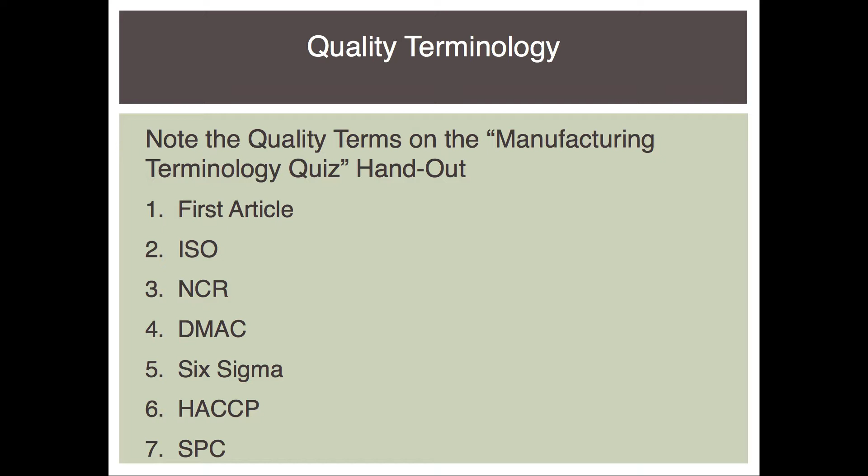I teach a class on problem solving which introduces the lean principles, 5S, Kanban, and also formal problem solving steps. From my background in manufacturing, knowing how to solve problems using those tools was extremely helpful in several of our processes.

The other term I wanted you to at least be aware of is called Six Sigma. It's a quality terminology process that was started by Motorola. Six Sigma defines that you can only have a certain number of defects per million parts. Whoa, that's a lot to measure, per million. So if you want to learn more about Six Sigma, definitely look that one up on the internet.

The other term that we talked about in our manufacturing series workshops is called HACCP, Hazard Analysis and Critical Control Points. HACCP is a requirement in any food manufacturing.

And the last terminology on your workshop is SPC, Statistical Process Control. Now, each one of the terminologies that I just mentioned, there can be an entire training program based around just that one term. So I wanted to give you a few quality terms that are very common in manufacturing, and hopefully if you've not heard of some of them, you would look up on the internet or do some research about them after today's workshop.

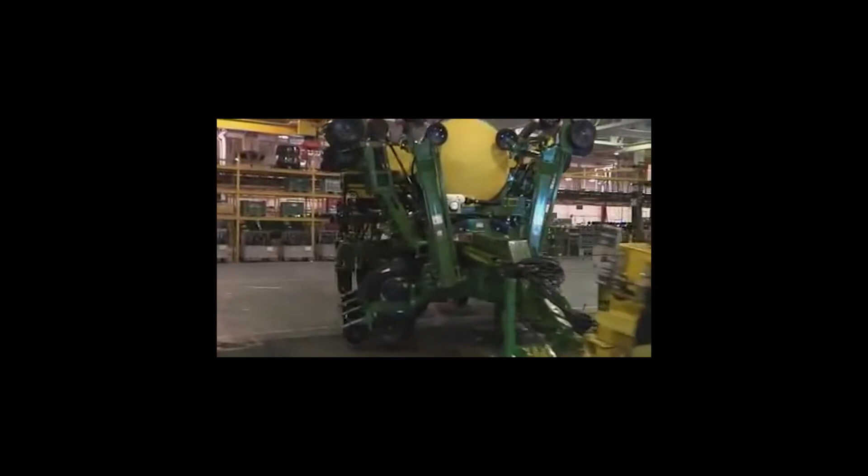Quality here has been a long-standing tradition. Everything we do revolves around quality. Started in 1837, John Deere was committed to quality. He always said that he would never put his name on anything that didn't have the best in it that was in him, and we definitely live by that. I would not want to put a product out there that doesn't meet the expectation for the customer. Quality is the same that goes in our golf product as our ag product. Every line in this factory and every line in other factories throughout Deere follow the same enterprise quality manual. So we all have the same processes, the same forms, the same documents, the same reference material that we can use to solve our quality issues.

Once we come up with our design, we can actually go off that design and do analysis. We can see on the computer if the design will meet customer expectations, before we actually build a prototype.

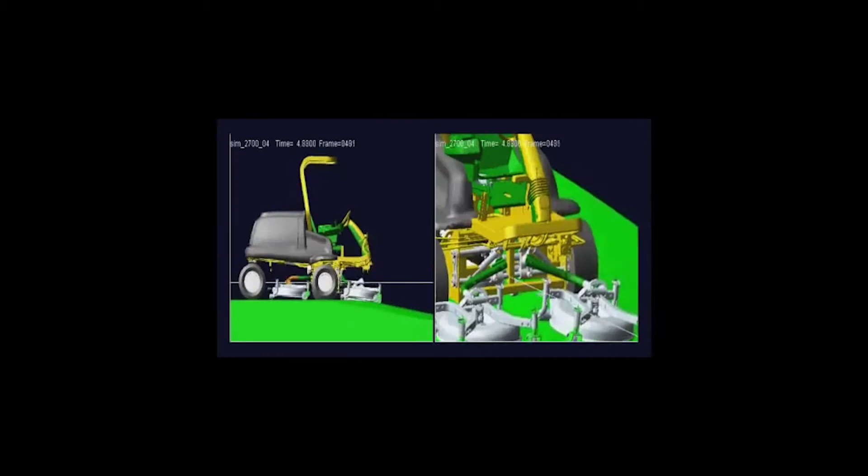John Deere doesn't shortcut on testing. We do field testing, we do lab testing. We also take our prototype machines to customers to make sure it's doing what is expected to be done.

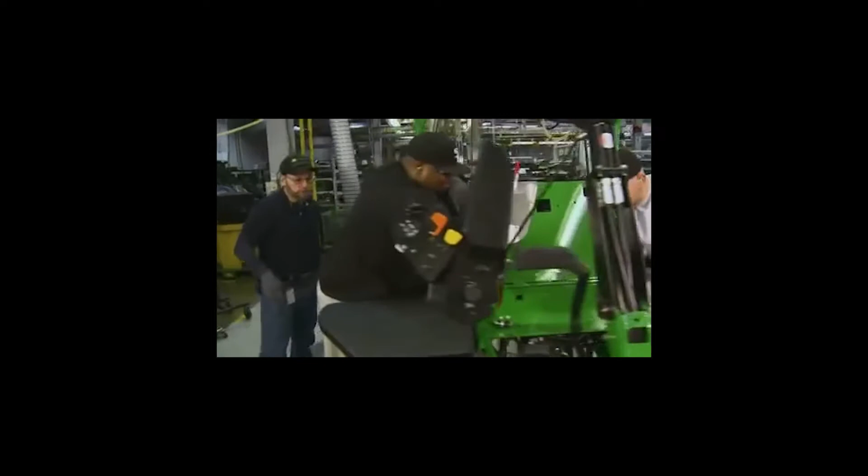When we're defining a product, we bring in manufacturing, weld, and quality people. What are our existing issues? What are our existing problems? We keep our assemblers in the loop throughout the whole process, from concept to out into production. It's kind of rare to see in today's world.

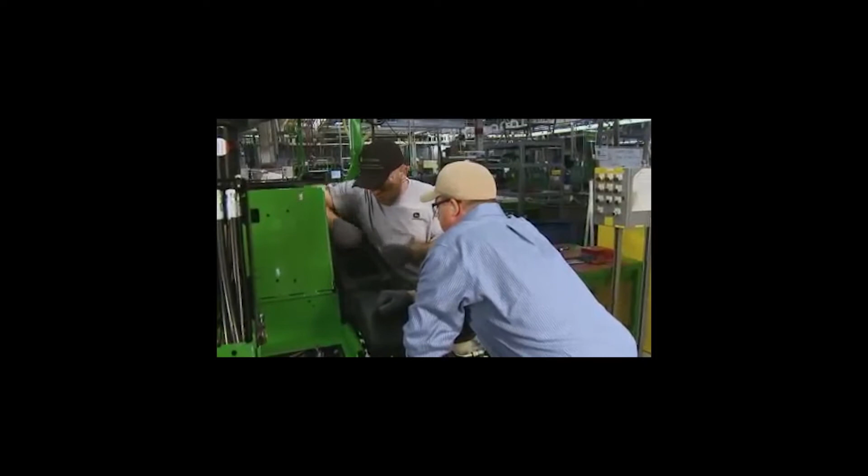It's really a team-based program on the fairway mower line especially. Everybody has a great attitude. They work great together.

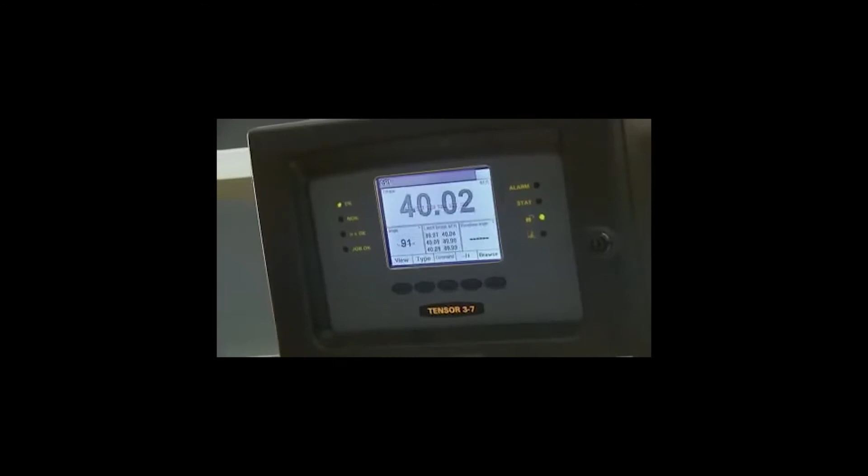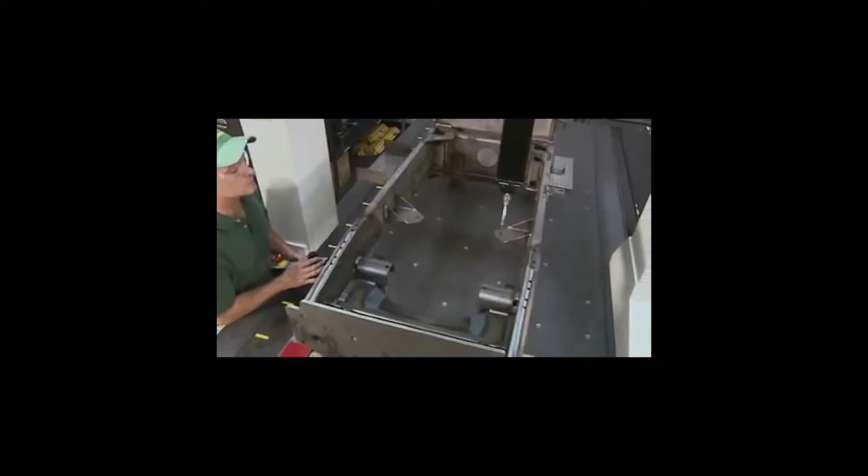We use all the most advanced technology that we possibly can to ensure the best product for the customer: controller-operated torque tools, Bluetooth-connected hand torque tools, paperless work instructions, Banner vision systems, RFID. CMM is a coordinate measuring machine. It ensures us that the parts we have out on the floor being built meet the print and meet the quality that we want it to have.

The fairway mower line does a 100% audit on all the products that come off. Mitzi, our auditor, will come in and go through about an 8-page inspection sheet. I probably know everything on that audit sheet without even looking at it. Torques, torque marks, loose hardware.

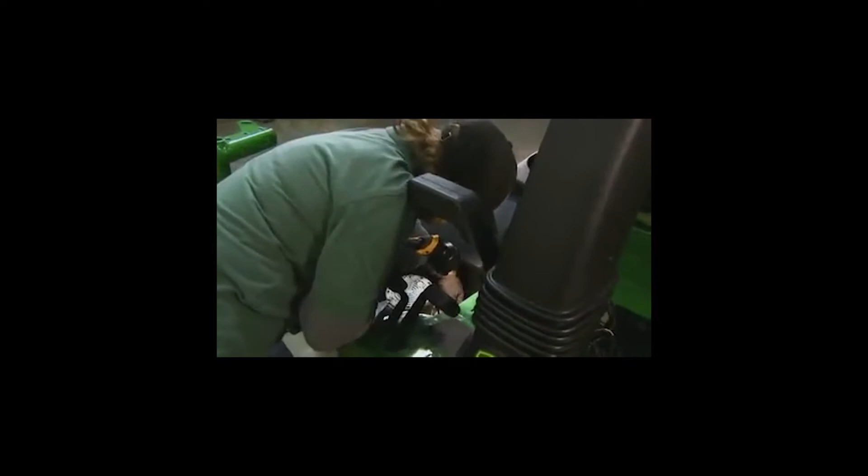Paint quality is inspected from top to bottom. All the safety decals, any missed welds, hydraulic lines, tie straps, harnesses, caution decals, information decals, hardware. We do safety tests. She black lights the machine to look for any leaks.

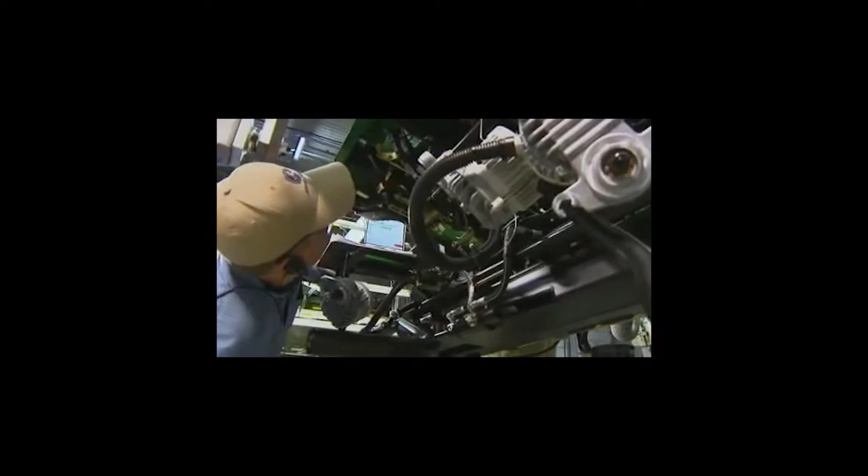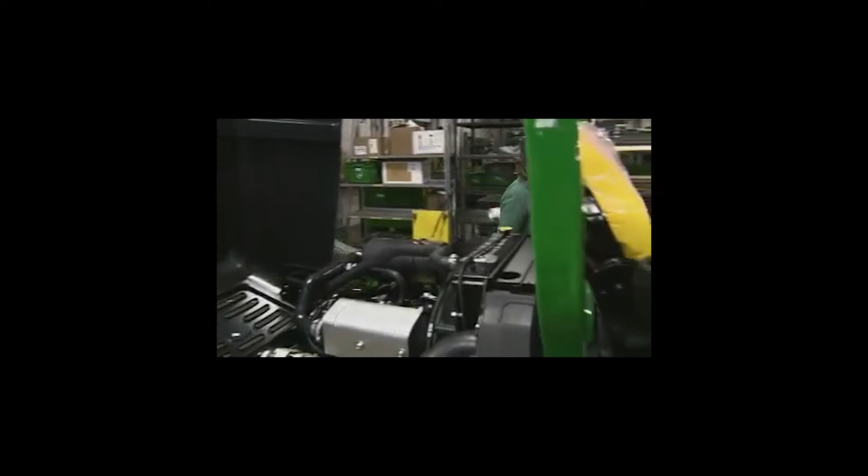Pretty much every portion of the machine is inspected, not only by the operator after he completes the work, but by Mitzi after it's completed off the line. Anything that doesn't look right, we question. When I audit a machine, I audit like I'm buying it. I work for the customer. I work for John Deere, but I work for the customer.

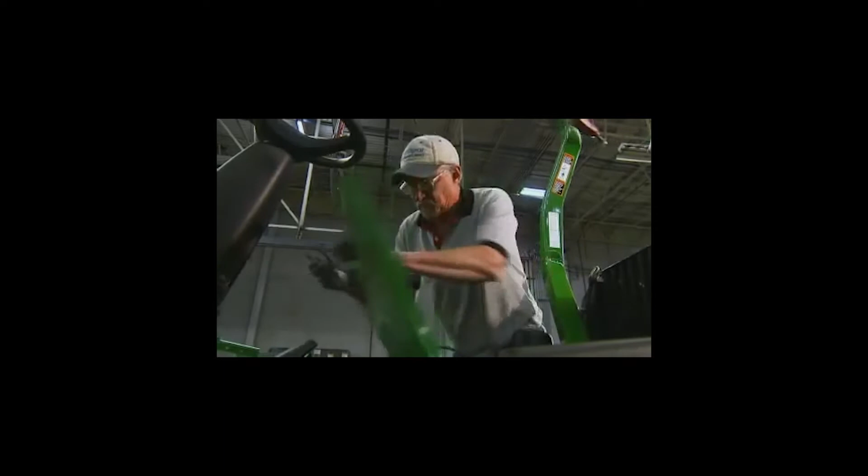Our people out on the floor care. I've had people tear up on the lines. They are so concerned with customer satisfaction. I don't like anything going out bad with my name on it and John Deere's, and it's not if I can help it.

We have generations of farmers that are still using John Deere equipment, and I imagine that in 3 or 4 more decades we're going to see generations of golf course people using our equipment. It comes down to sustainability. Quality is sustainability. We're proud of our processes, we're proud of our people, but at the end of the day, we're most proud of our customers.

If it's got green on it, it's John Deere, John Deere's quality. John Deere's got the best of everybody that's worked on it.

When you watch the video on John Deere, my only concern with their quality was that they said they were very careful about not sending out a part that they would not buy themselves. Well, who defines quality? Is it the workers within the building? Is it the supervisor? Is it the manager? Is it the quality manager? No, quality is defined from the customer.

However, back at John Deere, they are an original equipment manufacturer, so basically they can set their quality standards themselves. So the customer defines quality, and the customer will let manufacturers know what their requirements are in terms of blueprints.

Blueprint reading is a skill that I have rarely any skills in. However, if you are interested in learning more about blueprints, I know that Chippewa Valley Technical College, or WITC, has some short-term classes in that.

The customer will also define their quality requirements by specific measurements: how long, how wide, how deep, and those measurements are designed and printed on their blueprints. They will also give customers a list of statistical process control parameters. I'll show you a slide a little bit later that will do a better job of explaining what SPC is.

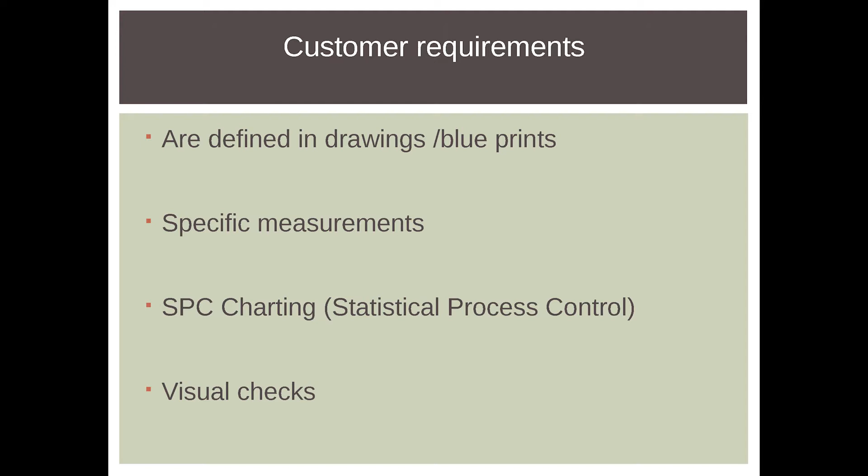But then also, they may say, these are the visual checks we need you to do on this part. Visual checks - I know the older I get, the worse my visual checks get. And so if we only used our vision to check parts, we would potentially have about 20% defects in the parts we are looking at. So this is a statistic that I'm going to give you a little exercise, and I'm going to prove to you this statistic: 100% visual inspection typically results in only 80% perfection.

Whoa. So if I visually checked 100 parts for specific defects, chances are about 20 of them will be defective and I may not even catch them.

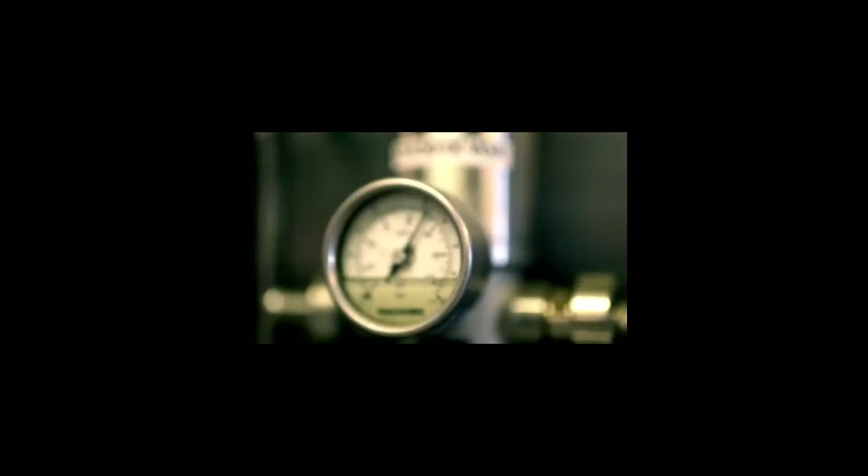Brewing beer is part science and part art. We're still brewing Germanic styles of beer with an American twist. A Summer Shandy is just a superb, very unique beer. When people drink this beer, you can just watch it in their faces. They're going, wow. When somebody's drinking a great tasting Leinenkugel's beer, they're getting over 6 generations of passion poured into each and every bottle that we take great pride in right here in Chippewa Falls, Wisconsin.

Discover. Discover. Discover how we make great beer in Chippewa Falls, Wisconsin. Discover more on Discovery.

I know, it's 5:30 someplace, right? But now we're going to not focus on beer from Leinenkugel's. I'm going to show you another amazing facility that manufactures food, and that's in our Eau Claire area.

That's Nestle's Food. Quality in food manufacturing is so critical. I'm going to let you watch this video, and they talk about how at the Eau Claire location, they make baby formula. If you've had a baby, or are a grandparent, or know of a baby, formula is critical. For that formula to be perfect, to be flawless, is critical.

I am a quality control specialist in the microbiology labs. My title is ingredient manager. Formulation specialist. I'm a quality control specialist, chemistry. I am the laboratory manager here at the Eau Claire facility, and I manage the operations of our chemical, physical, and microbiological laboratories. We're a very well-respected laboratory within the Nestle world.

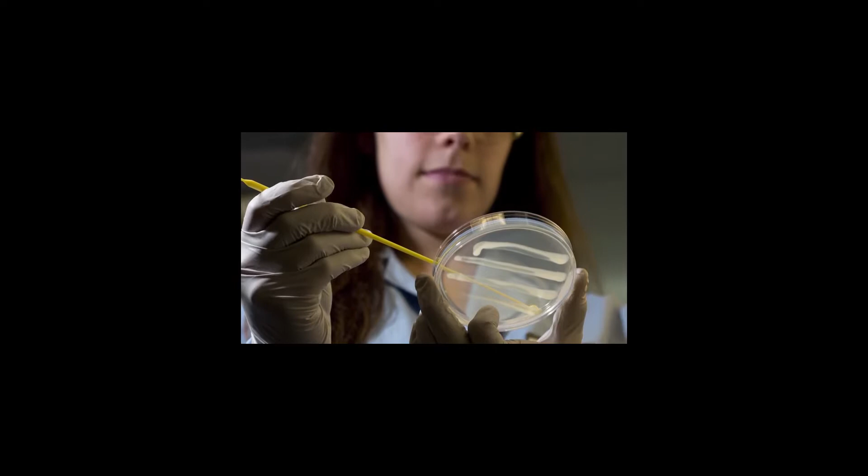Some of the techniques we use in the lab here at Nestle, I learned how to do at UW Eau Claire. In the microbiology lab, we test all of the products made here at Nestle Nutrition in Eau Claire, which include baby formulas, the liquid kind, and powder. I oversee all of the ingredients we use for the Nestle Nutrition and Nestle Health Science products. I am responsible mainly for the vitamin A/E method. I test the vitamin A and vitamin E in the product that we produce and make sure it's where it needs to be.

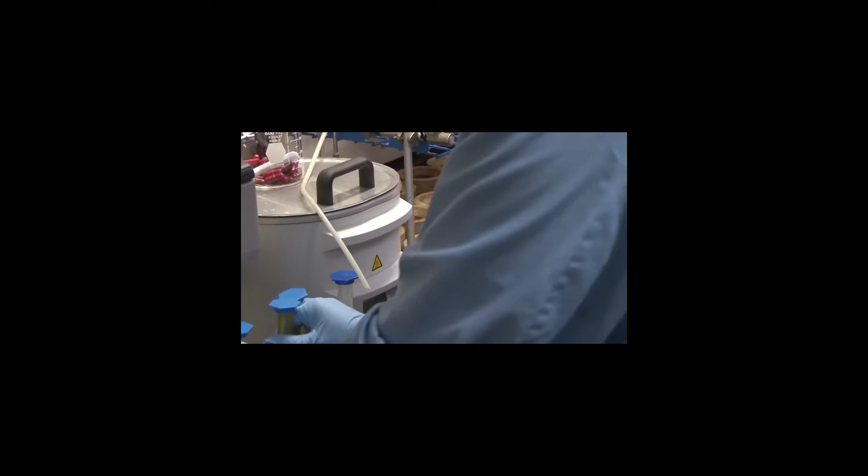I think this is just one example of how the university is preparing students, giving them the training and the skills that they need to hit the ground running in a job and be productive and useful workers. I think Eau Claire prepared me really well. I feel that I've been able to take exactly what I've learned and really apply it. I also think the LibEd, the liberal education experience here, also serves to challenge our students and take them to the edge of their comfort zone.

I think it's important, the well-rounded liberal arts education. Being able to talk in front of people, being able to write technically, has been very strong skills that I directly learned from school that I apply daily.

I look at myself, and I finished a bachelor's degree, I finished a master's degree, and then within a year I was in a supervisory management type role.

The core studies that you do contribute to rounding you out. The link that we've established with Nestle proves that we are preparing students to be right out of the gate productive workers. We are sending students out who can contribute right away to the economic development in the state.

So I've shown you a couple of manufacturers as they talk about how important quality is in their processes. Yet how do the employees know what the quality standards are? How do they know how to do their jobs, especially when that job is as critical as food? So a lot of companies will use work instructions or work procedures.

The company that I worked at, we implemented many tools of lean manufacturing, and the tool that we used to train our employees was called standard work. So on the next slide, I'm going to give you an example of what a standard work document looks like.

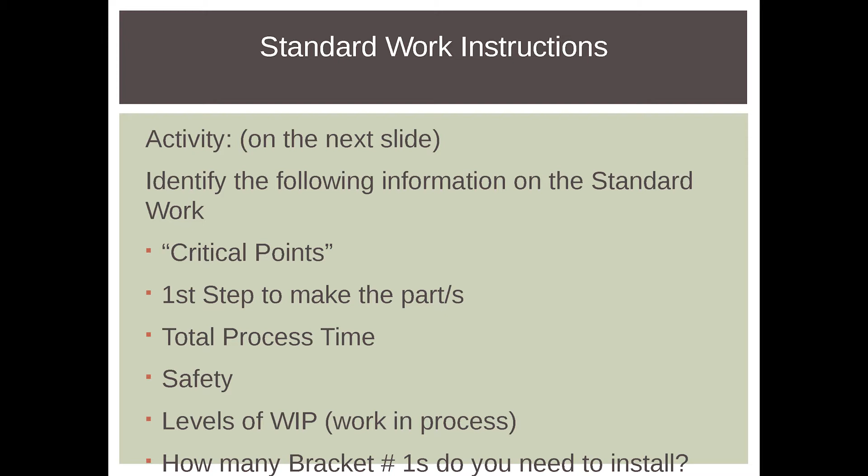On standard work, it will also point out where the critical points are, what point of that process or of that piece you are manufacturing needs to be measured, what needs to be checked. It's going to give you step by step how to make the part, and tell you how long that process should take. Standard work will also point out any safety concerns or hazards to be aware of. It's also going to tell you how much material you should have in your process, and show you with pictures how to produce this part.

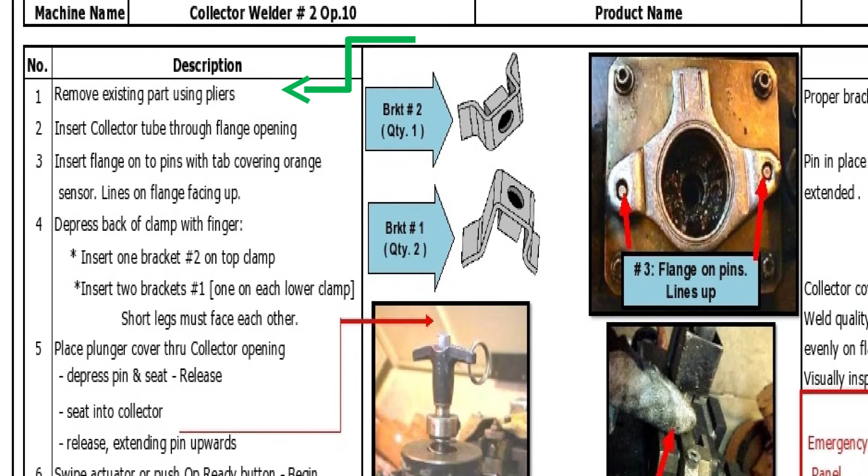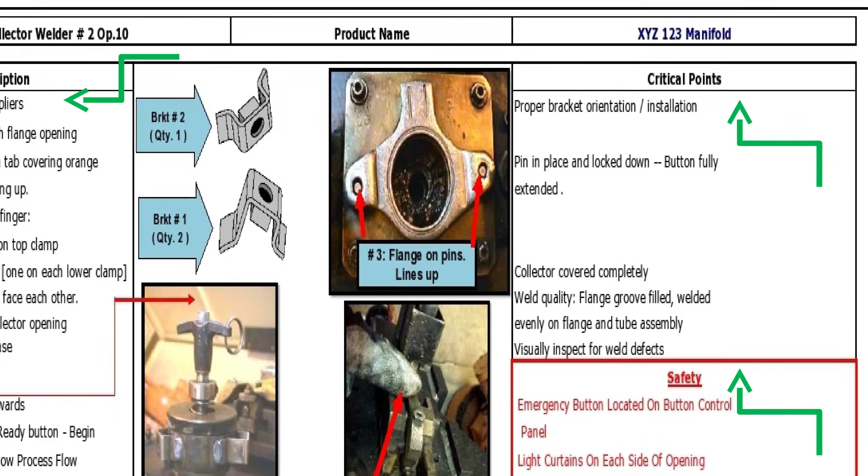So when you look at the standard work slide, look at the green arrow under the part that says description. There are 7 steps to make this part, clearly defined step by step. Also look over on the right-hand side of your document where it says critical points - those are your quality checks.

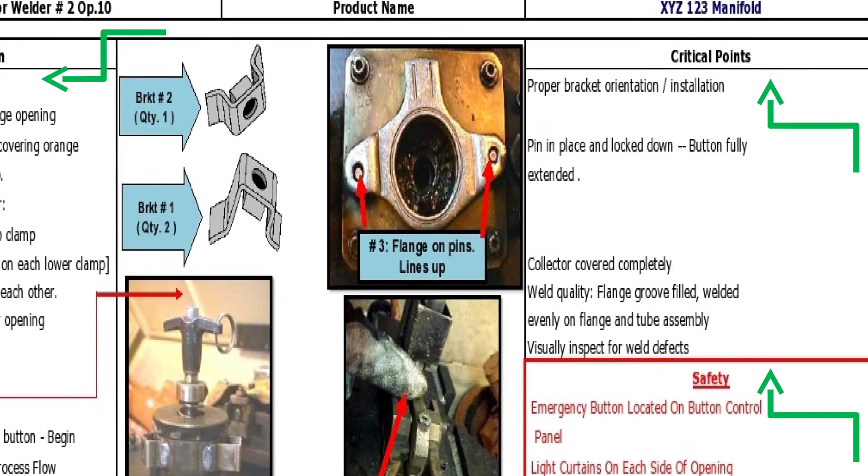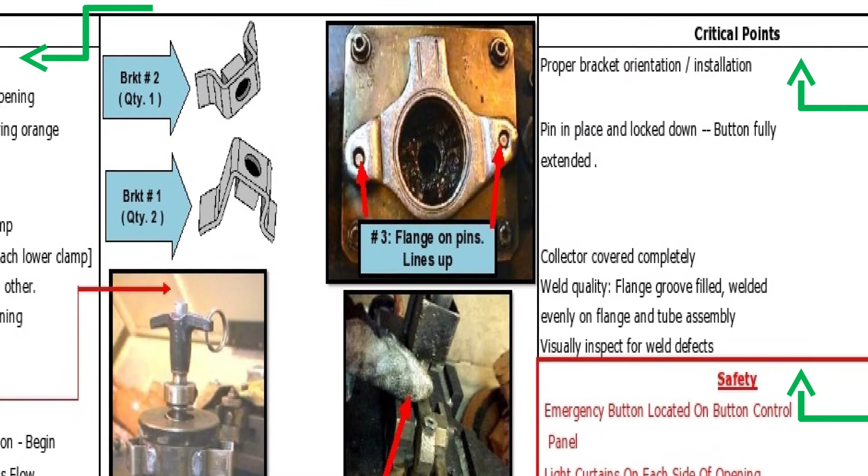It clearly writes out what you need to check for, making sure the proper bracket is oriented, that there's a pin in place and locked down, that the collector is covered completely, having you check the weld quality. And also note in red all of the safety concerns or safety pieces to be aware of. So standard work is one tool that many manufacturers use not only to help train their employees in safety and the procedure, but also what the quality requirements are for that process.

Well, I'm going to talk briefly about tape measures. And of course, not all manufacturers use them, but many do. And if they don't, maybe this will be a good learning for a few things in your home. So using a tape measure, there are a few tricks that I want to share with you.

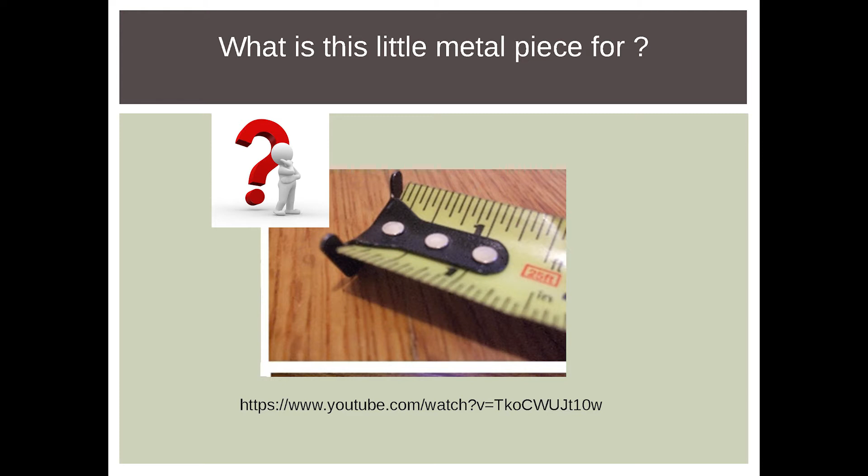With any tape measure, granted they're all different sizes and made of different material - the cases are. This one is a 25-foot tape measure, and notice, what is this little metal piece for? And, oh, is it broken? It kind of moves around and jiggles on there.

I'm not quite sure. When I put together the material for this presentation, one of my coworkers said, Bonnie, you need to tell people what that little metal piece is. His background was also manufacturing, he worked in manufacturing many years. He said it was very common for people to pull out their tape measure, get a little hammer, and knock down this little metal piece. Yikes, right? And so this little metal piece is meant to move.

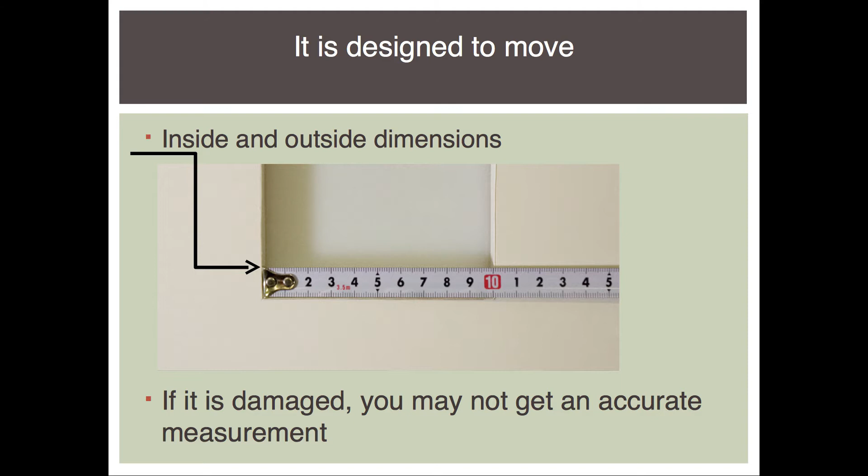It actually, as you can see in this slide, measures not only the outside dimension - you would hook it on the outside of, say, a table - so it could measure the outside or the inside dimension of whatever you're making or assembling. If this is damaged or missing, your measurement is not going to be accurate.

I have a short video that I'd love for you to watch, and this woman clearly describes several different uses of the tape measure and what that little part is for.

Hi everybody, I'm Lee of CJ Drill, and today I want to show you a couple features on a tape measure that you may not have noticed, or maybe you did notice but you just didn't know what they're for. Come on in close and let me show you what I'm talking about. Now I have a few different tape measures here. It's 16 foot, I've got a 25 footer, a 12, and even a 6.

One's metal and three are plastic, and I've got to tell you, it really doesn't matter. The features are all the same.

So I'm going to pull the tape measure out, and the first thing you'll notice is there's a slot there. See that slot on the end? Well, it's not just a design, it's actually a feature. It's a nail and screw grab. Let me show you how it works. So there's our slot, right?

Here's a nail. What happens is you put that slot right over the nail and it secures the tape in place. So if you're by yourself and don't have someone to hold the other end of the tape, that nail grab holds the tape for you so you can make that measurement. You can use a screw or a nail, it really just doesn't matter.

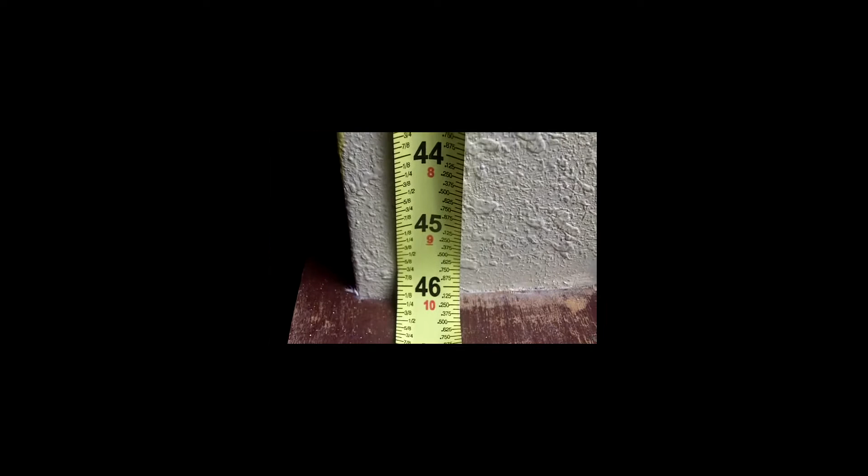Believe it or not, it makes it easy to make an inside measurement, and I'm going to show you exactly what I mean. Say you're making an inside measurement. I want to measure the inside of this window, right? Okay, so I've got my tape measure in place. But the bend of the tape measure distorts the reading, so it makes it really difficult to read. What the heck does that say?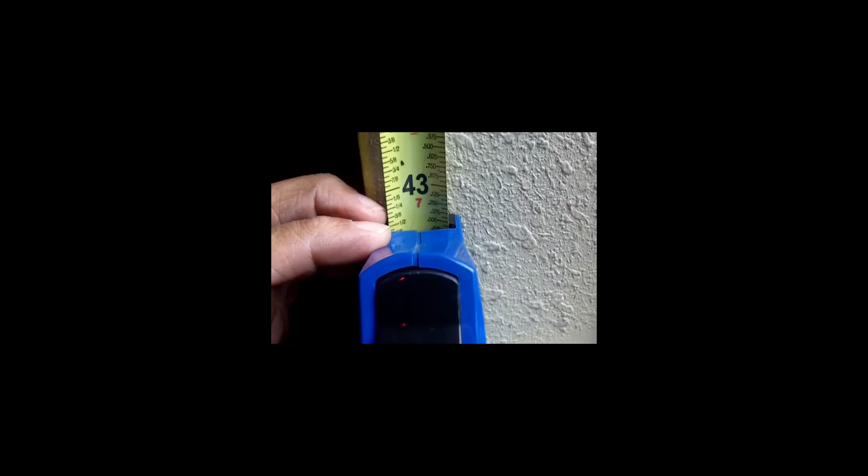So what I have here is my tape measure in place, snug up against the wall. What I'm going to do is not rely just on the tape itself. I'm going to use the tape and the body of the tape measure, because we know the base is 3 inches from the top to the bottom here. So we add 3 inches to the 43 and a half inches that's on the tape, and we come up with 46 and a half inches, and that's an accurate measurement.

So hopefully I showed you a couple features, or a few features, on a tape measure that maybe you didn't even know your tape measure had, right? Like that scribing tool. This is Leah saying you can do this. See you next time.

I'm going to give you a few tips on how to read a tape measure. To be honest with you, if a tape measure is anything higher than a sixteenth, I can't read it because it's too tiny. And from my experience in manufacturing, if a critical control point did need to be to the 32nds, chances are they're not going to be using a tape measure to do that measurement. So I have a handout for you, and on the handout it looks like a one-inch measurement of a tape measure.

It will have all of the lines in a 1/16 of an inch tape. For those of you not familiar with how to read it, I always tell people to look for the longest lines first, because the longest line on any tape measure indicates the inch. Most of the time it'll tell you 1 inch, 2 inch, but then the next longest line is the 1/2 inch.

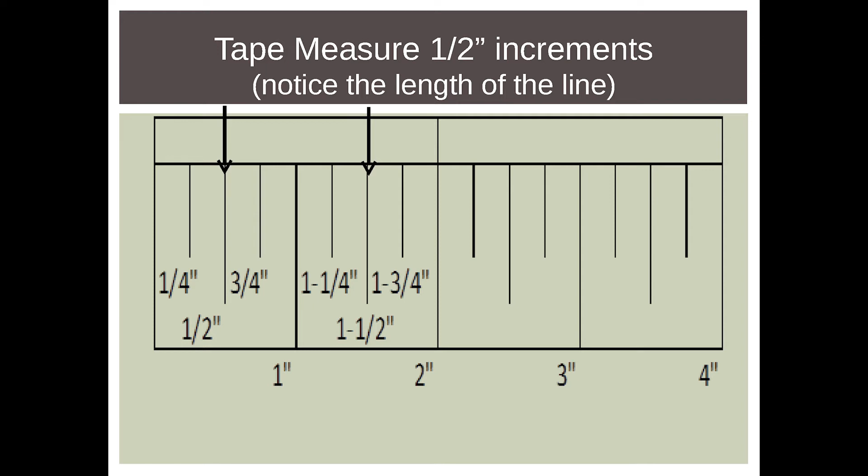Because the 1/2 of an inch is where fractions come in. You're probably thinking, fractions? I thought we were talking about quality. Well, you need to understand fractions in order to understand a tape measure and what you're clearly reading. The 1/4 of an inch is the second longest line on your tape measure, and a 1/4 is the same as a quarter. We all like money, so when you think of a quarter, there are 4 quarters in a dollar, so there's 4 quarters in an inch. Spend a couple seconds and look for that quarter mark on your tape measure.

I'm going to show you now how to read it. You would read 1/4, but you would not say 2/4, which is next. You have to break 2/4 down to your lowest common denominator, which is 1/2. Most of us get that piece of it, so 1/4 and 2/4 is pretty easy to break down. So you have 1/4, 3/4, and then you have your inch.

Now we're getting a little bit trickier, and now we're looking at the eighths. On your tape measure or on the handout I gave you, look for the line that is the next longest line, which should be the second line in from the inch mark, and that's your 1/8 line. If you're having a hard time seeing it on your handout, look on the slide. This is a blown up version of how to measure in 1/8.

So we say 1/8, however, the next reading we do not say 2/8. We say 1/8, 1/4, 3/8, and then there's our half, and we don't say 4/8, remember we say 1/2, and then 5/8, 7/8, and then 8/8 is the same as 1.

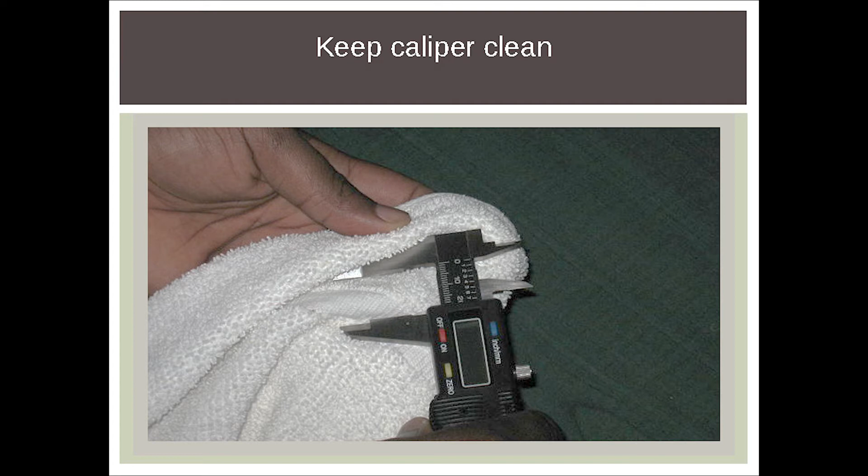When using a caliper, the first thing to do is remember to keep it clean. In between the jaws or openings, if it's not clean, it may actually get rust if it doesn't dry out completely after each use. So check your jaws and your slide, making sure it's clean and functioning correctly.

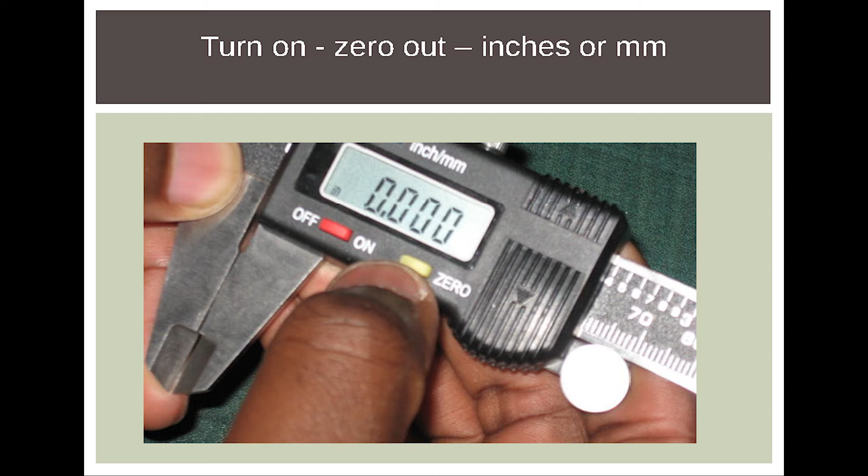The first step in using a caliper, after you know it's clean, is to turn it on and zero it out. I'm going to show you a short video in a few minutes that gives step-by-step instructions, including how to turn it on, zero it out, and change it from inches to millimeters.

Aren't you happy that we still read in inches? However, if your employer is producing parts from Europe, those measurements may be in metrics. That's the other nice thing about calipers, with a little push of a button, you can now read in metrics and or inches.

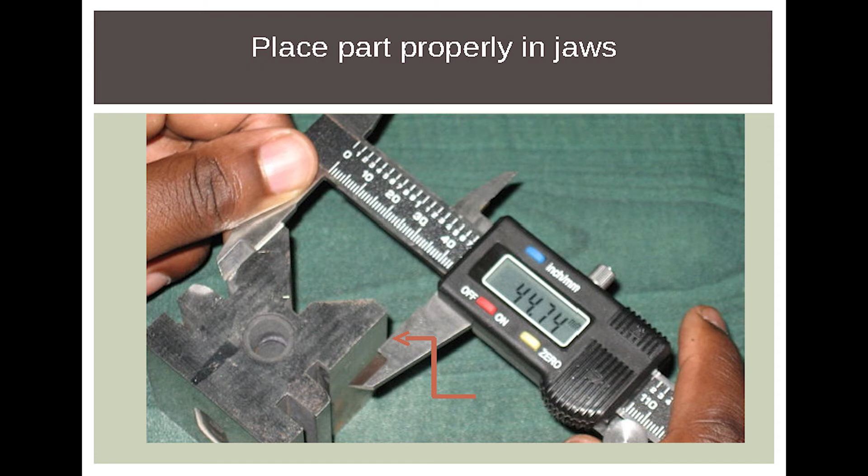This picture shows you how to place the part properly between the jaws. You want to hold the caliper firmly, but not too firmly, and make sure you don't hold it too lightly so the part falls out.

I wish I had a caliper at each location so you could follow along with me, but hopefully the handout I'm going to give you will provide good ideas and step-by-step instructions on how to use one. There are three different ways to use a caliper: to measure the outside dimensions of an item, the inside dimensions, and the depth of an object. I'm going to let you watch this YouTube video where she gives examples on how to measure those various dimensions.

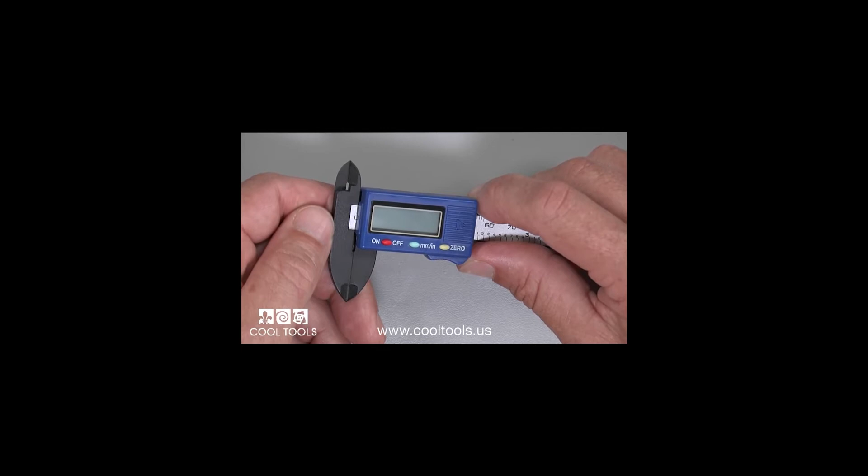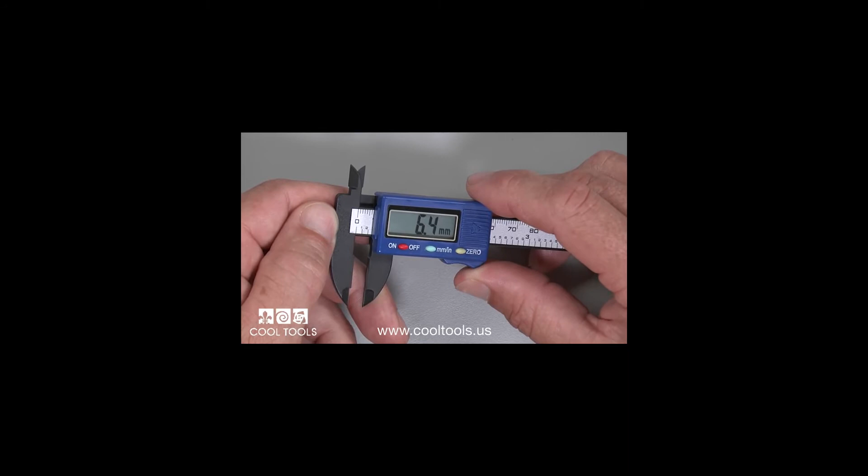This handy digital caliper measures in both inches and millimeters. To use the caliper, turn it on by pressing the red button or just slide it open. The yellow button resets the caliper to zero. Slide the caliper open to measure an article. You can toggle between millimeters and inches by pressing the blue button. The measurement can be reset to zero at any point to find the difference between sizes.

Simply reset to zero when you're done. Measure gemstones, settings, wire, metal thickness, and even inside diameters on items up to 100 millimeters or 4 inches with digital accuracy.

You can read a caliper by just reading the numbers on that LCD screen, right? But what do all those numbers mean? If your reading is 1.1, what the heck is that 0.1? Well, this is another little math lesson.

When you're reading a caliper, you're actually reading decimals. So if your 0.1 is tenths, the next two numbers after that point, you're now reading hundredths. And if you have three numbers after that point, you're now reading thousandths.

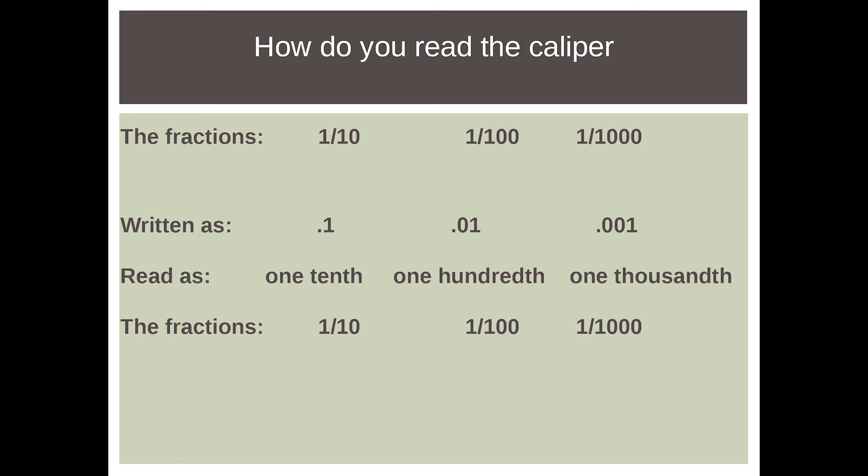So look at this screen, and it says the fraction equivalent of 0.1, or 1/10, is 1/10. So hundredths and thousandths—to me, it helps to equate those decimals to fractions because most of us are more practiced using fractions in our day-to-day life.

I don't know about you, but I love to bake. Fractions are as simple as looking at my measuring cups—what is a half? Where's my 3/4? Where's my 1 cup? So if it helps, relate it to measuring recipes. For those of you who like to build items, this is going to help you also.

So reading the decimal, oftentimes I also tell people compare it to money. On your caliper, if it says 0.1, it's the same as 1/10. 1/10 of a dollar is 10 cents. So when you write 10 cents, you write 0.10. It's the same as 10/100ths.

So practice on your worksheets, read the number out loud, and I also encourage you not only to read it out loud, but to also write them out. You might think, oh, this is really a pain, and it might be. Yet if your job requires you to use a caliper, it's really important that you understand what you are reading.

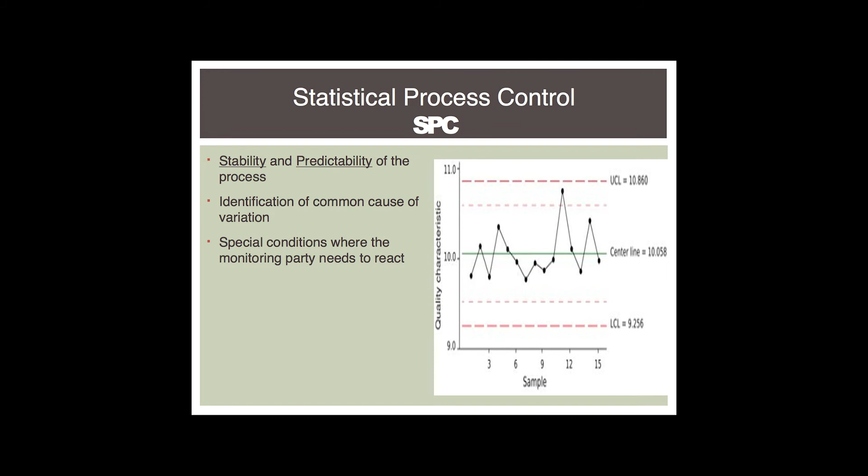So with statistical process control, as you can see from this slide, there will be an upper control limit, or UCL.

So that's the largest that this part should be. There will be a center line, or a median, and then there'll be a lower control limit, or the lowest measurement that this part should be. And as you can see on this graph, this process, or this part, has a lot of variation, and yet, looking at that line, it tells me it's normal.

If your job requires you to know about SPC, the best place I can encourage you to go is the internet. If you do a search on SPC, it's going to tell you anything you ever wanted to know. But I also know that our local technical colleges do have classes on statistical process control. Or you can go to Stout and take a class in statistics like I had to. I passed, but only with the help of an amazing tutor.

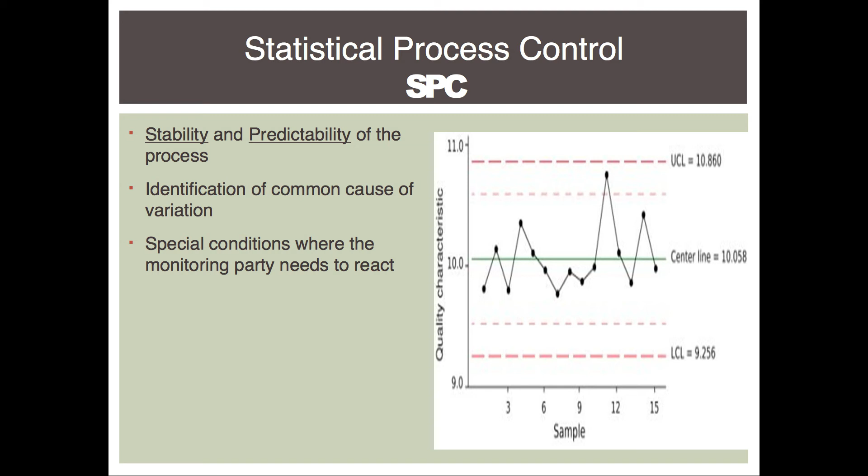So statistical process control is going to tell you stability, predictability, and show you normal variations or special variations, or special cause. So you think you know a lot about quality. Is 99% quality good enough?

So if I had to measure 100 parts and one was bad, is that okay? Well, I'm going to show you this handout, and after we look at it, let me know if you think 99% quality is good enough.

Statistics show that hospitals would give 12 newborns to the wrong parents every day if 99.9% was good enough. I just had a new granddaughter. I would be terrible. I would be so upset if they gave her to someone else.

Is 99.9% good enough? Well, the United States Post Office would mishandle 18,322 pieces of mail every hour if 99.9% is good enough.

The IRS would lose 2 million documents this year. Probably one of those might be your tax returns. Two planes landing at Chicago O'Hare Airport would be unsafe every day. No wonder I don't like flying.

I'm going to give you one more. Doctors would write 20,000 incorrect drug prescriptions this year if 99.9% is good enough.